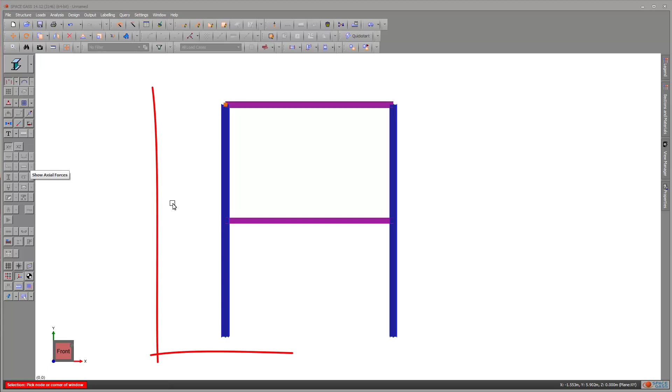Let's consider the scenario of a moment frame, as depicted on your screen. Our objective here is to incorporate bracing members strategically. This addition of bracing is intended to effectively mitigate the lateral deflection that arises when a lateral load is imposed upon the structure.

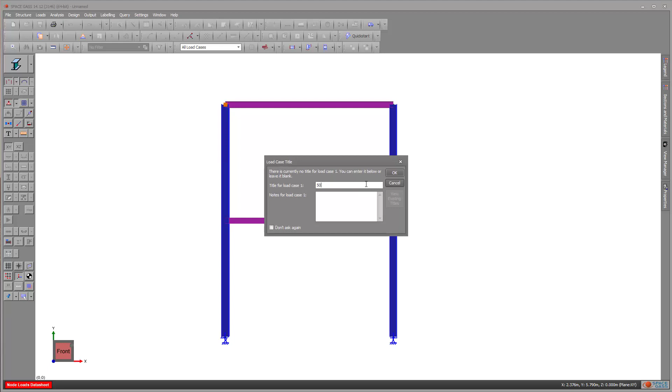In this specific illustration, we will simulate the application of a horizontal load of 50 kN. This force is directed towards the right and is applied at the upper left corner of the frame.

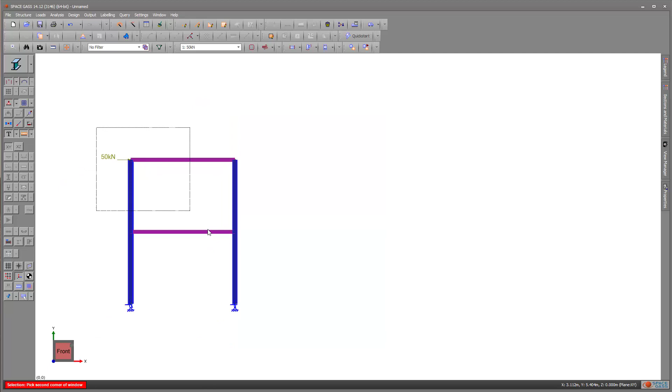To facilitate a clear comparison of the impact of the bracing members, let's create a duplicate of the entire frame. This duplication will enable us to directly observe and assess the effects brought about by the introduction of these bracing members.

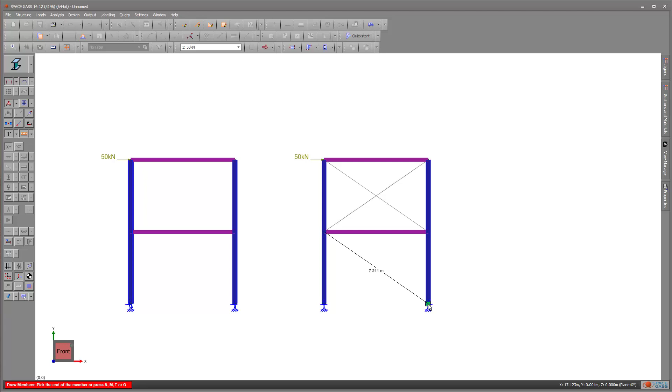To start with, maybe we can assign a small equal angle section to these bracing members. We can always go back and change them later if necessary.

Moving forward, our objective is to designate the bracing members as tension-only elements. This specific classification ensures that these members are exclusively capable of bearing tension loads and are immune to any compression forces. Let's initiate a nonlinear analysis to obtain results for both the braced and unbraced frames.

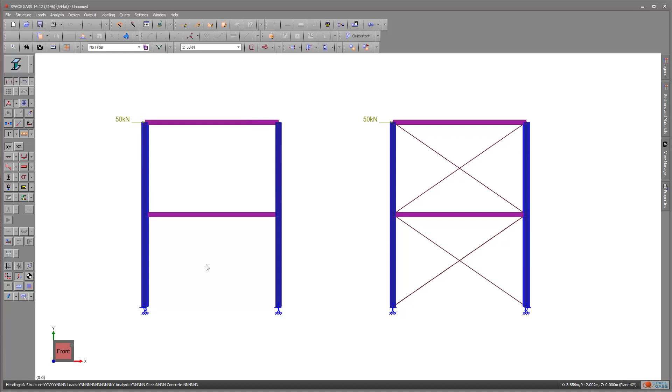By displaying the deflection results, we can clearly see that the lateral deflection exhibited by the braced frame is notably 1/10 of that observed in the unbraced frame. This striking reduction in lateral deflection underscores the efficacy of the introduced bracing members in enhancing the structural stiffness and mitigating the extent of displacement under the applied lateral load.

You might have also observed the absence of two bracing members from the configuration. This outcome is a direct consequence of their classification as tension-only elements. These members have been automatically excluded from the frame since they are in compression.

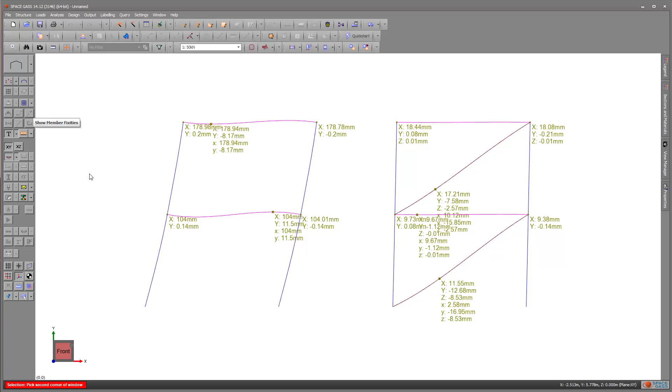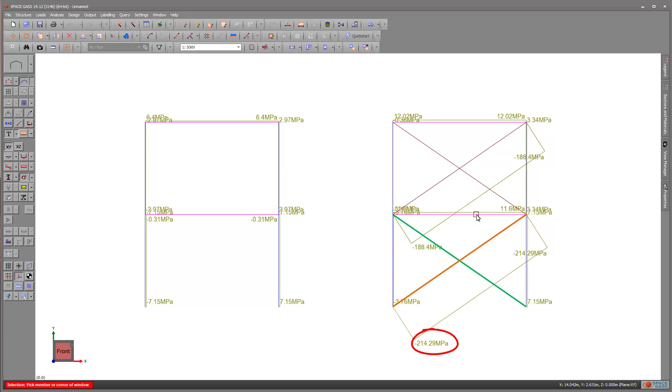Next, we want to check the axial stress in the bracing members. Typically, we want to keep the axial stress below the yield stress of the steel. It looks like the bracing members are experiencing quite a high axial stress. We can reduce the stress by choosing a bigger section.

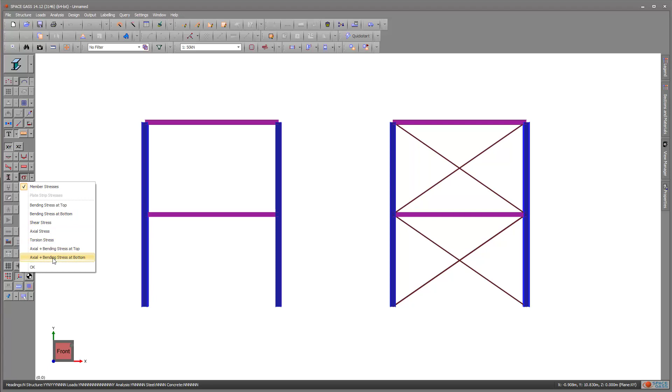Evidently, the utilization of a larger section has led to a significant reduction in stress levels. In the current scenario, the stress magnitude is now merely 1/3 of its previous value. Also, the lateral deflection is further reduced. That's the end of the tutorial.